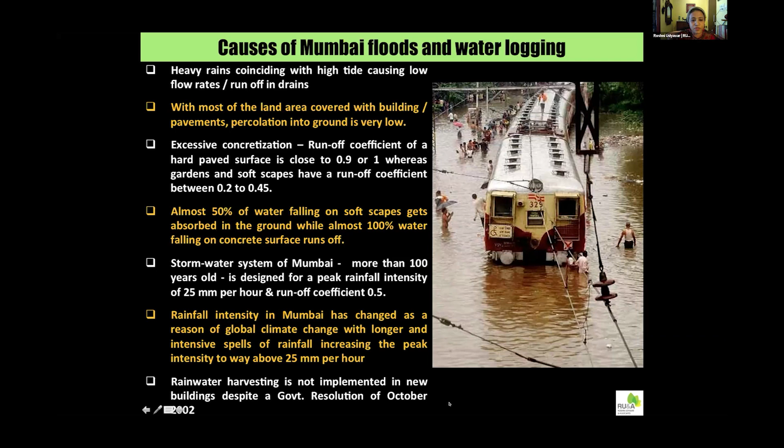Another idea is how to have more and more rooftop gardens. Of course, the concern is that the water might come inside the building, percolate and cause damage. But if it is properly done using proper waterproofing, this is not an issue. In fact, in many countries, it has been identified now that this is a sort of a holding. It delays the time span by which water goes out into the streets and into the stormwater drains.

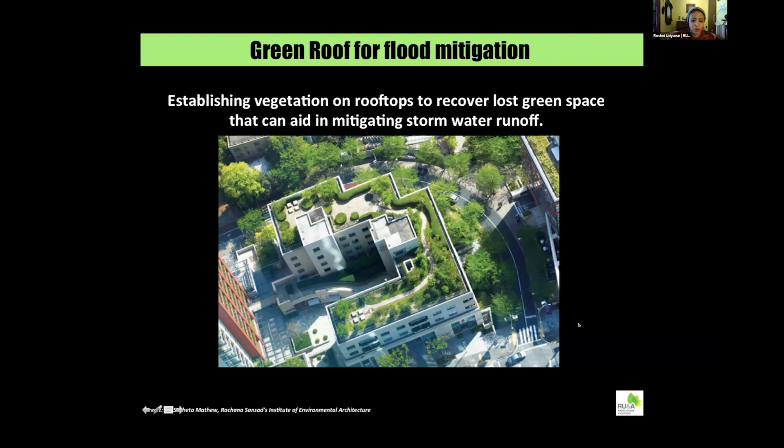So a lot of buildings are also looking at rooftop gardens, and apart from reducing stormwater, they have other benefits like increase in biodiversity and reducing the urban heat island effect.

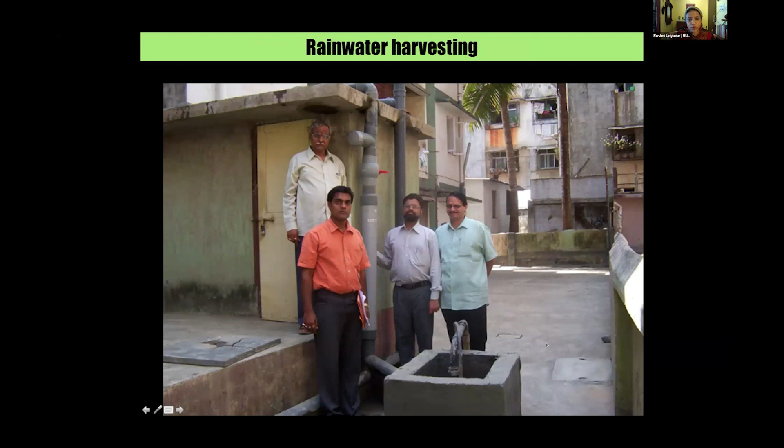Rainwater harvesting. This is one of the first cases that we had done in the city of Dombivli. People don't have water, and we provided water, and at the same time avoided the whole issue of flooding that was happening over there. This is at a city level.

We have the Mahim Nature Park, which has 37 acres of land, and this particular pond, which was built, holds about 1 lakh liters of water. So imagine this much amount of water going into the stormwater or the Mithi River is prevented, and this water provides for the irrigation of the entire park throughout the year.

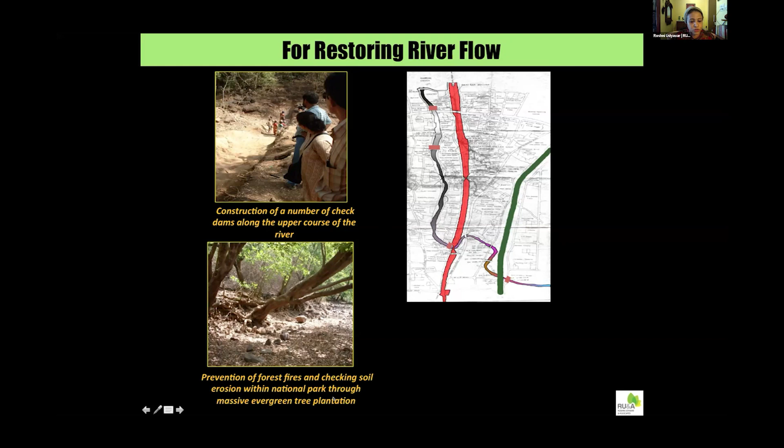So you can see this natural 90-degree bend. This is where all the flooding happens, and almost all the buildings in this area get submerged. So these points that you see are the places where we have proposed interventions like construction of check dams, prevention of forest fires, checking the soil erosion within the national park, and construction of baffle walls that reduce the speed at which the water flows. It's a kind of rainwater harvesting system itself.

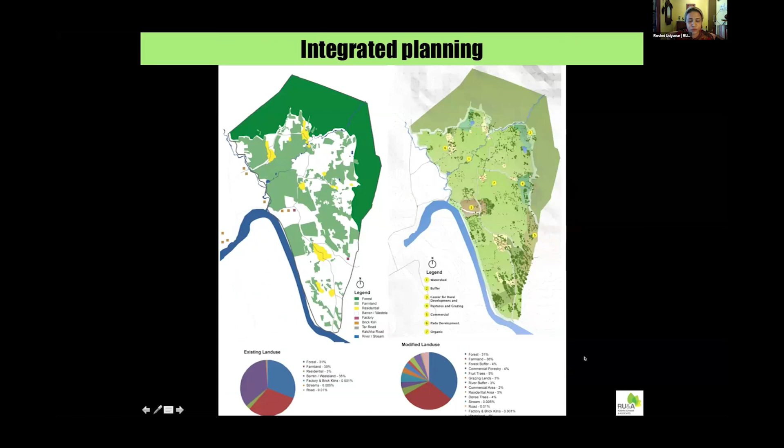At the planning stage, of course, we need to look at something called land suitability analysis, and therefore look at a macro level of planning with the hydrology and geology of the land in order to see that the places which are likely to be flooded are not occupied by habitable spaces. Land use plays a major role. The change in land use causes a lot of issues with respect to flood.

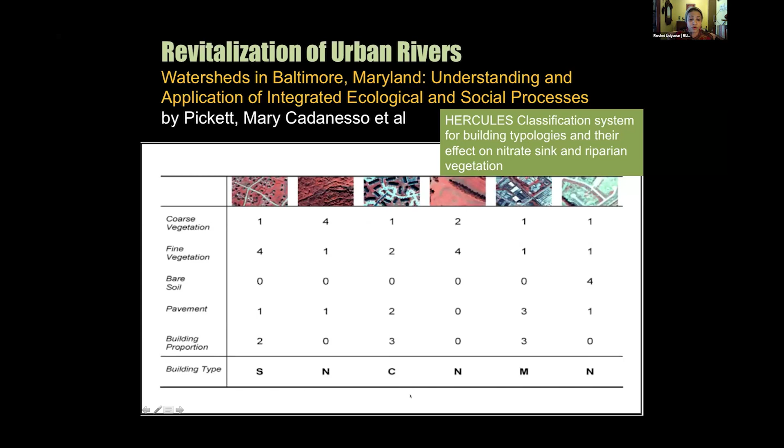And I just want to share this one very interesting study by Mary Cadenasso from Baltimore. She has actually pointed out how different types of surface areas in a city contribute not only to the flooding but also to the change in the riparian system, which is the edge of a river, and therefore they change the nitrate sink. So this is also very interesting.

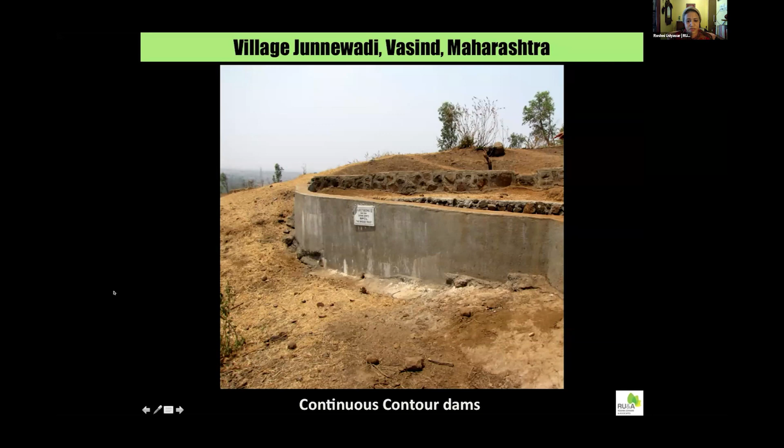In rural areas, this is an example of a watershed management technique, and this has definitely shown various results, like continuous contour dams, which help to retain the water longer than it would actually have been there.

At the international level, I just wanted to point out that we are talking about monsoon resilience, but climate resilience is the buzzword. There is a project in the Netherlands called Room for the River, where they actually removed a dike and made way for the water to flow through. So that prevented a lot of flooding. We can cite similar examples in Mumbai and surrounding cities, where reclamation has actually led to an increase in flooding and so on.

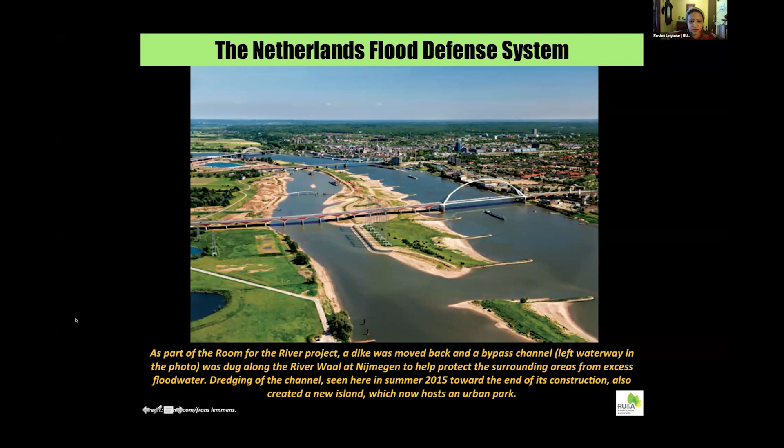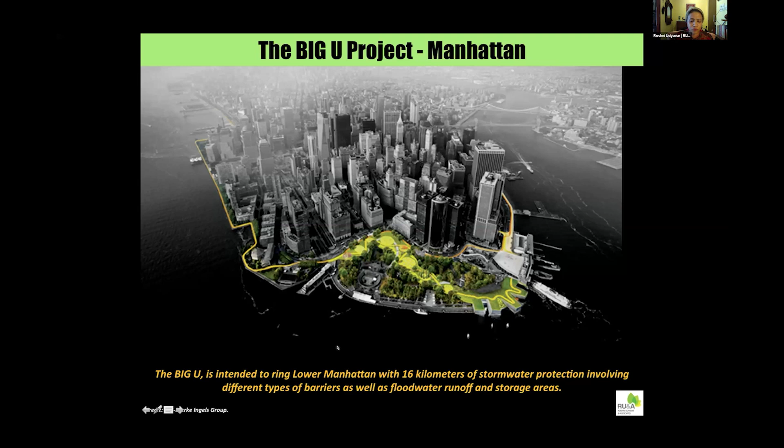And then we have the Big U project in Manhattan, which has created a whole network of softscapes for stormwater protection of the city, and different types of barriers, both natural barriers and mainly increasing the softscape networks around the city. We have many such examples in India itself.

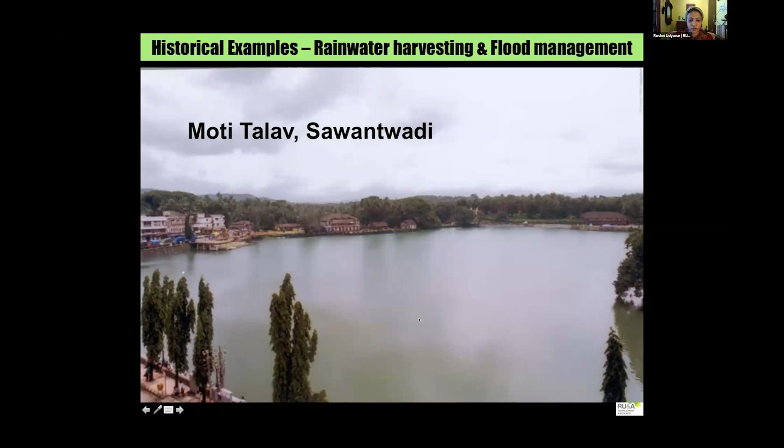These are the large lakes which actually act as holding ponds, holding lakes, and reduce flooding incidences and protect the rest of the land. At the same time, they actually lead to recharge of the groundwater and help in getting the groundwater into the wells and the bore wells.

So in summary, I would say prevent excessive concretization in cities, planning based on natural drainage aligned with the stormwater system, soil erosion prevention measures in villages, design and planning of drainage for existing and projected population, rainwater harvesting and decentralized water management practices, increasing vegetation and tree cover, and protection of buffer and riparian systems of rivers and water bodies.